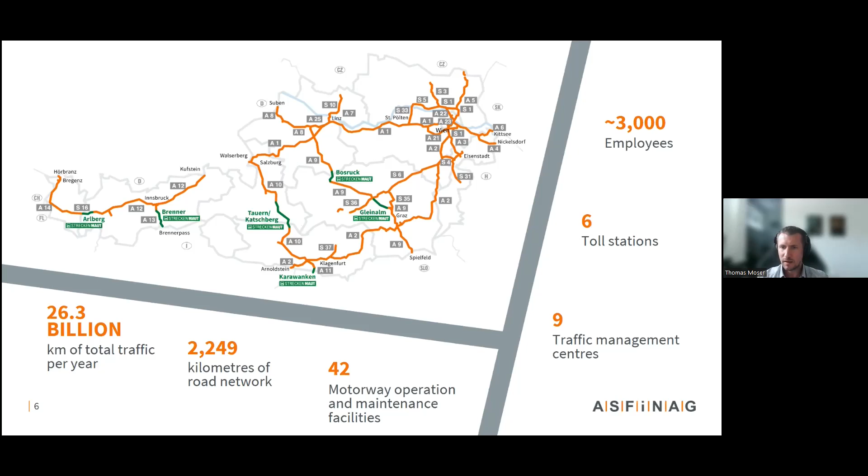We handle about 26 billion kilometers of total traffic per year with a road network of 2,249 kilometers. We have 42 motorway operation and maintenance facilities and 9 traffic management centers which are responsible for monitoring the traffic and setting actions if necessary, for example speed limits, lane closures, or rerouting if we have problems on our network. Furthermore, we have 6 toll stations for our special toll routes, for example the Karawankentunnel, Tauern-Katschberg, or the well-known Brenner. And all these tasks are provided with about 3,000 employees.

So let's get to our main assets. What are the main asset categories next to bridges? First of all, we have the pavement, which is one of the most important asset classes for any infrastructure owner. We have a total length of 2,249 kilometers, which means 12,200 lane kilometers, with an area of approximately 53 million square meters of pavement and asphalt, where about 2/3 is asphalt and 1/3 is concrete pavement.

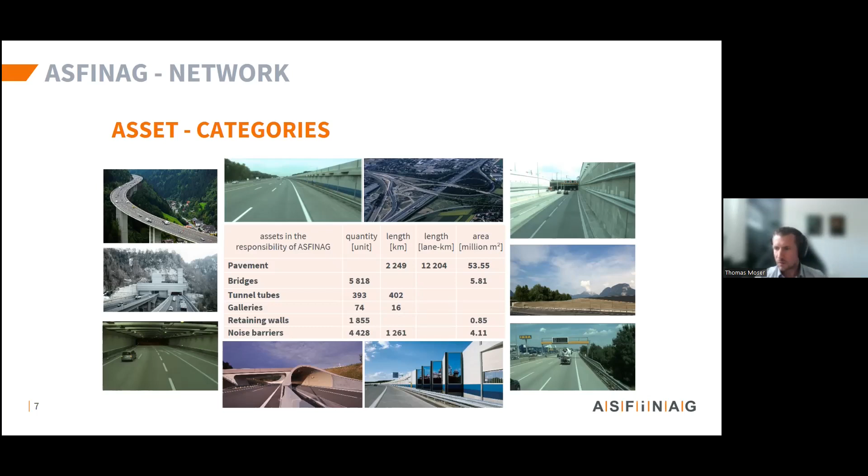The next important assets are the bridges. We have 5,818 bridges with a total area of 5.8 million square meters, which means our average bridge is about 1,000 square meters. Due to our topography in Austria, we have, in relation to our net length, a high amount of tunnels. We have 393 tunnels with a length of 402 kilometers.

And the next assets are also very important, but we call them minor assets. So we have 74 galleries, which are often connected with our tunnels, 1,855 retaining walls, and approximately 4.1 million square meters of noise barriers. And this area is still rising, so we expect a little more in the near future.

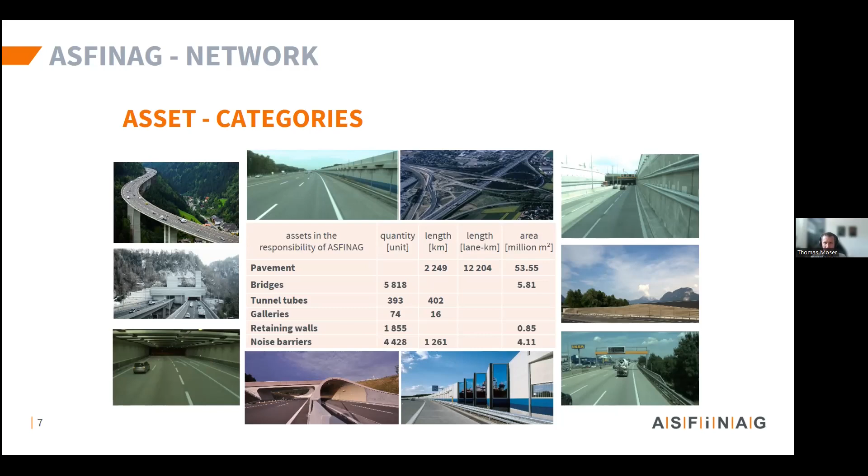In 2021, for example, we have a very huge new tunnel project, the second tube of our Karawankentunnel, and a very interesting big construction site in Vienna at the A23. It's the Hochstraße St. Marx. It goes right through the city of Vienna, and there was an amount of more than 100,000 square meters of bridge maintenance, which cost about 130 million euros. So this is one of the most expensive bridge constructions in 2021.

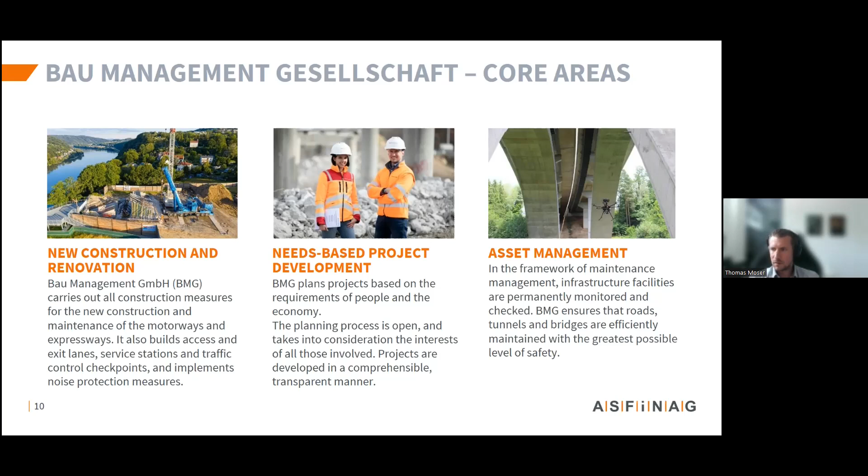To understand our budgetary needs for the future, I want to show you the development of our network. We can see we have a high increase of our network due to the 70s and 90s, which leads to increasing expenditure due to this extension.

And when we look at the chart, we see that all assets which were built before 1985 are relevant for maintenance and reconstruction now. So we have a high amount of assets and areas which are budget relevant now. All other assets, so let's say after 1985, are not relevant at this time, but they will be relevant in the future. This is a very important thing.

On the right-hand side we see the average age of our assets. We can see that the bridges, for example, are on average 38 to 39 years old, which means the first big maintenance is just done or shortly before. It's always a big impact on our budget.

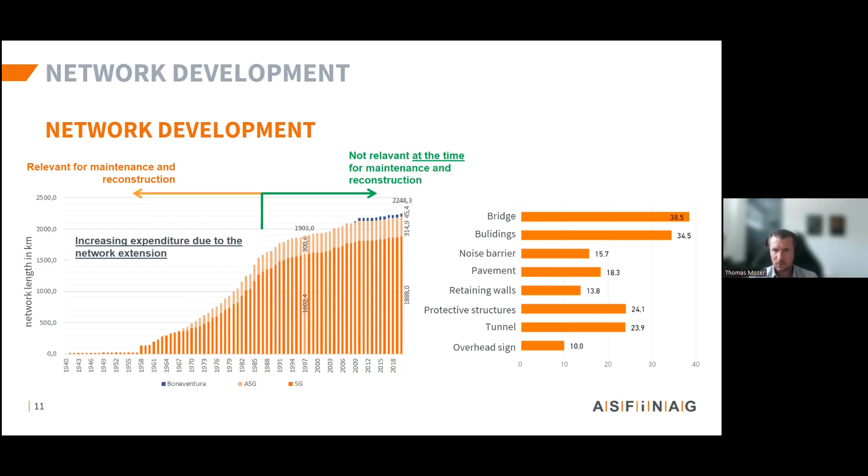And when we look 30 to 40 years into the future, there we have a huge renewal time for our bridges in the network. In detail for our bridges, about 50% of our bridge surface in our network was built between 1970 and 1990, which means the average age is about 38 to 39 years.

On the right-hand side we have a distribution of our bridges combined with their condition, where we can also see this high amount of bridges in the years between 1970 and 1990, this area here. We have a combination of the distribution of building year and condition, and we can see that all the bad condition and very bad condition - 4 or 5 condition rating - are the older constructions.

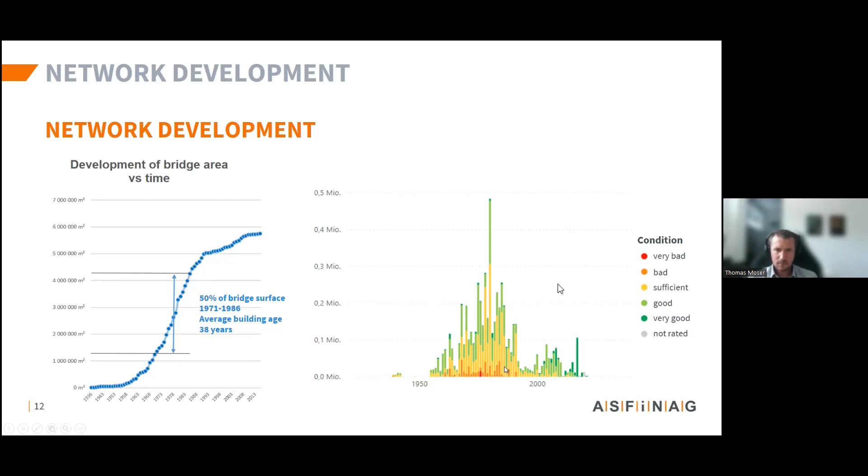In the last slides, we saw how the network was developed. To be able to maintain an aging infrastructure, the budget and budgetary needs must also rise. As we can see here, the budget for maintenance is constantly rising. These numbers are just the budget for maintenance, not building completely new roads and new infrastructures.

As we can see here, until the year 2021 we have the budget we used, and from 2021 into the future we have the planned budget. For example, in 2020 we used about 192 million euro for maintaining our pavement and 207 million euro for maintaining our bridges. In the future, these amounts are still rising.

In the year 2025, 232 million euro for pavement and 283 million euro for our bridge maintenance program. The forecast shows us that we will reach a steady state for our budgetary needs at about 1,000 million euro in the year 2056, after a huge peak in 2048, with a price basis of 2021.

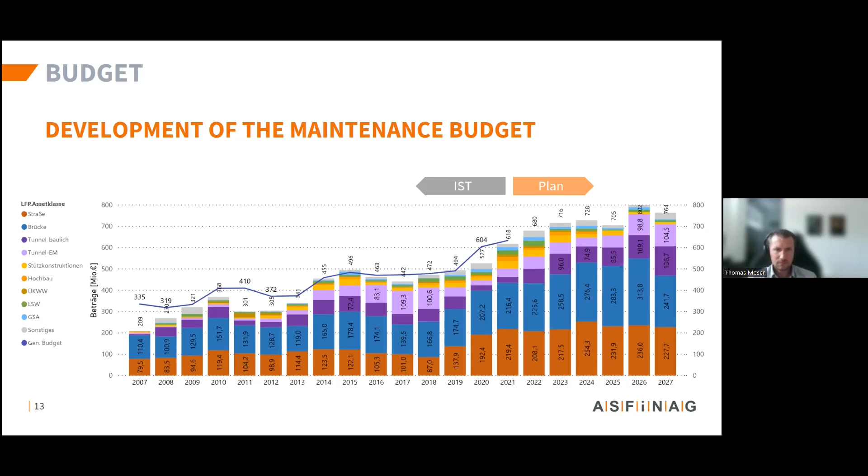One main topic is the definition of maintenance measures for our assets. On the other hand, we have the team engineering, responsible for developing the maintenance strategy, reporting, and coordination with the ministry, which is the owner of ASFINAG. In addition, the colleagues from engineering are also responsible for technical support on site, coordination of participation in guidelines, and organizing the internal inventory documents for all our assets in our network.

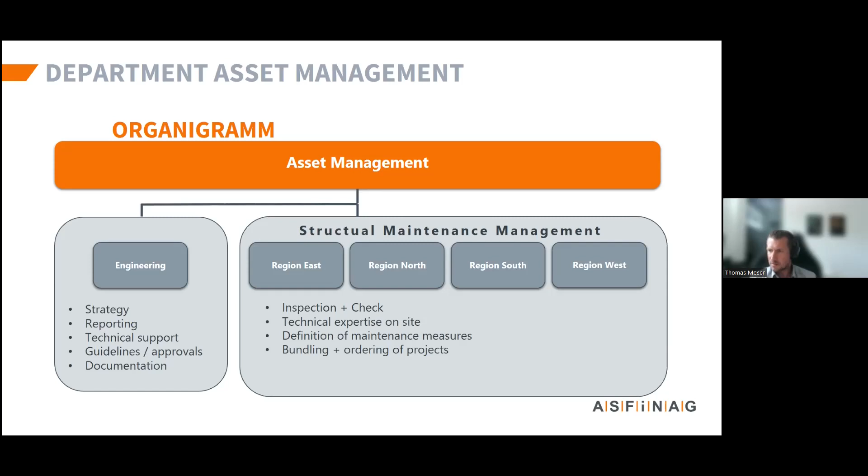So I told you something about our maintenance strategy. To fulfill the targets of the company, a maintenance strategy was developed in the past based on the mission of ASFINAG. We divided it into 3 different levels to manage our goals. The first level focuses on the main strategy, which is anchored in the mission.

For example, for structural safety, we have to have condition-defined measures for our structural engineering buildings if we have a condition rate of 4 or 5. These defined measures could be a building measure, a reduced inspection interval, monitoring, or organizational measures such as lane closures, for example.

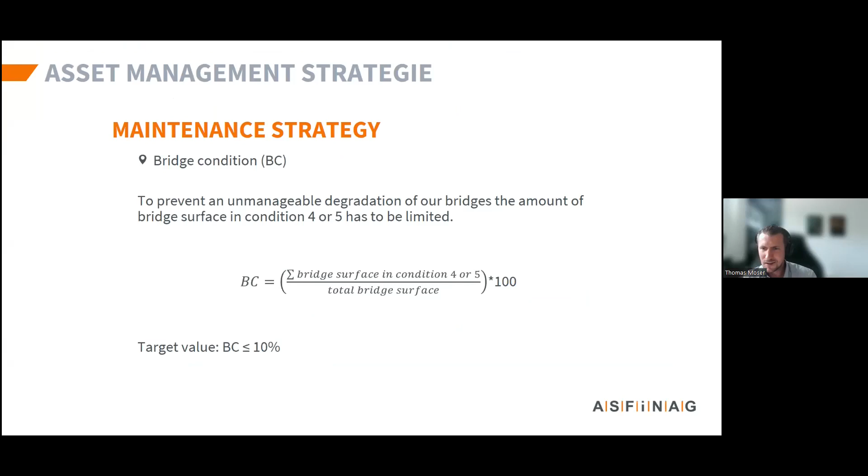The reason why this KPI is in the column network availability is because with a high amount of bridges in a bad or very bad condition, we are not able to provide an available network according to our targets.

And we want to manage our projects, and we don't want to be managed by our projects. So we try to limit the bridges in a bad and in a very bad condition.

Actually, we have about 7% of our bridge surface in condition 4 or 5, but just one bridge is in condition rate very bad, and this will be reconstructed next year. So 7% in condition 4.

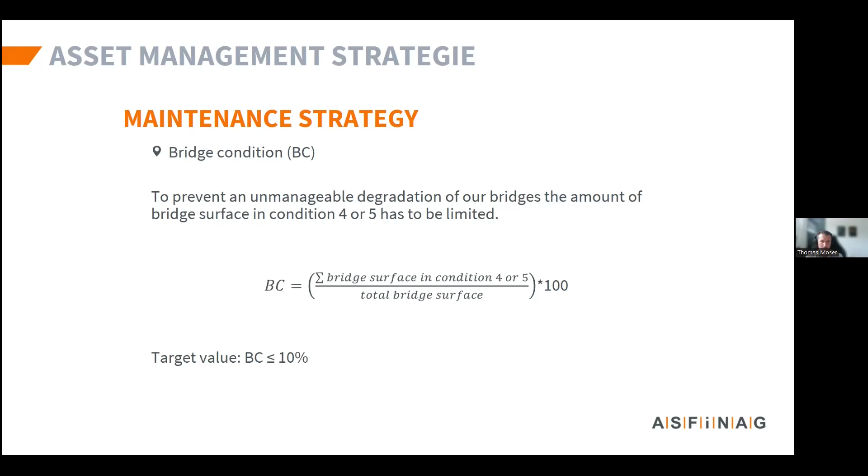So what are the management tools we use to manage our assets? We distinguish our tools in two main groups: software tools for operational activities and software tools for reporting and analysis.

On the one hand, we have the infrastructure management tools, a tool for the visualization of the pavement condition, and some other project management tools, for example, project request management and project management system.

And on the other side, we have software tools for reporting and analysis. For example, the pavement management analysis tool, dTIMS, and a common Microsoft tool, Microsoft Power BI, a business intelligence tool.

Where we are able to show information from different databases and combine information from different databases and combine data so that we can gain knowledge from the different data and the different information.

So the colleagues are on site with a tablet or an iPad or something like this, or another handheld, and do the inspections and the checks via iPad online.

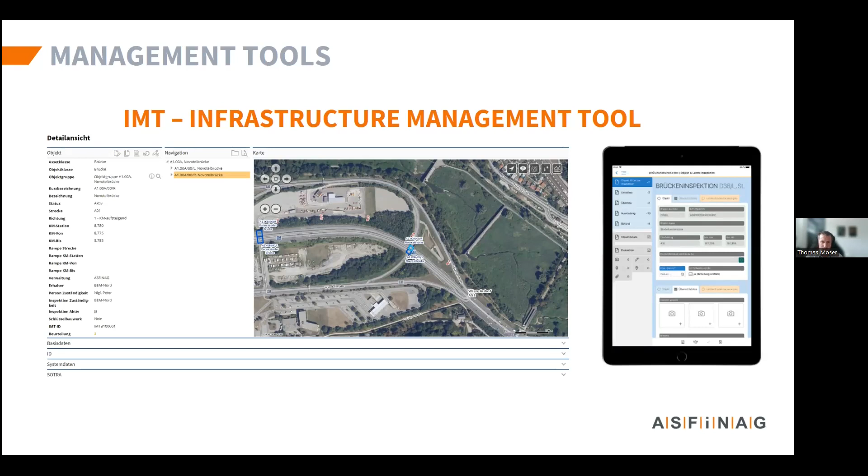And then we transfer all the data into our database. And the front end in here is the program ProOffice, and all the data are organized with this program. So this is our main tool to organize inspections, checks, and to organize our data.

And in the future, we will be also able to show information of our construction program so that we can directly see the pavement condition in the affected areas or in the planned maintenance areas.

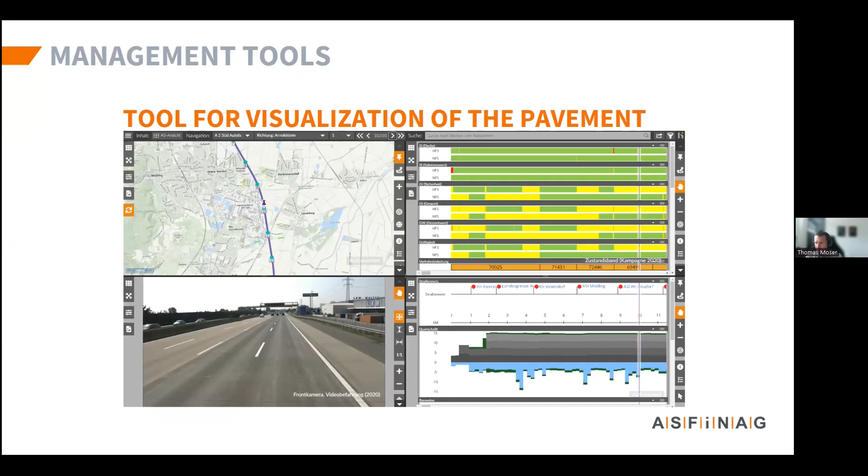For example, we have 3,213 bridges with a condition rate good.

So for example, we have at the A1 approximately 500,000 square meters of bridges on the whole track.

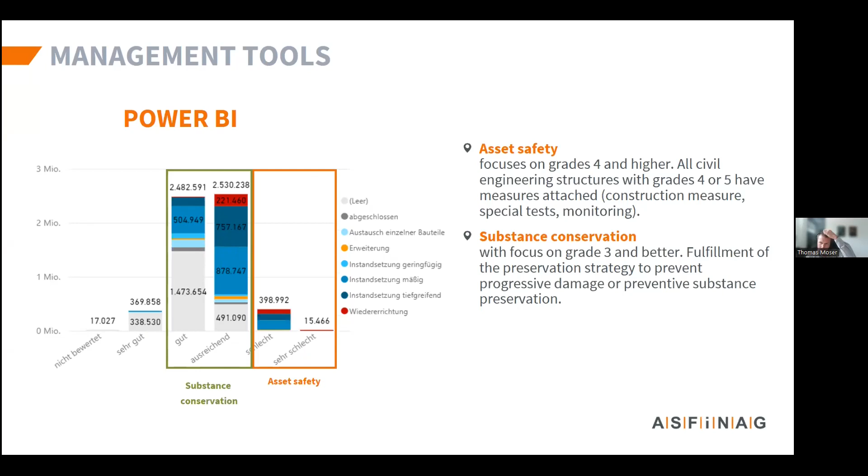So, and the next thing, the recalculation of bridges at ASFINAG.

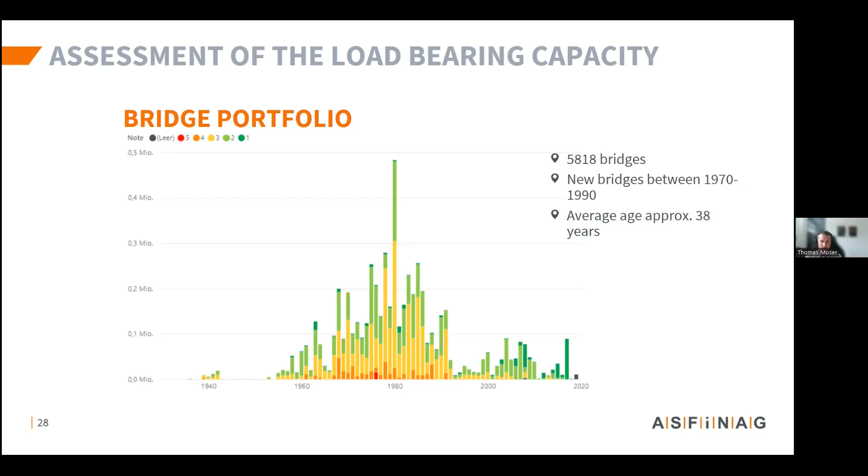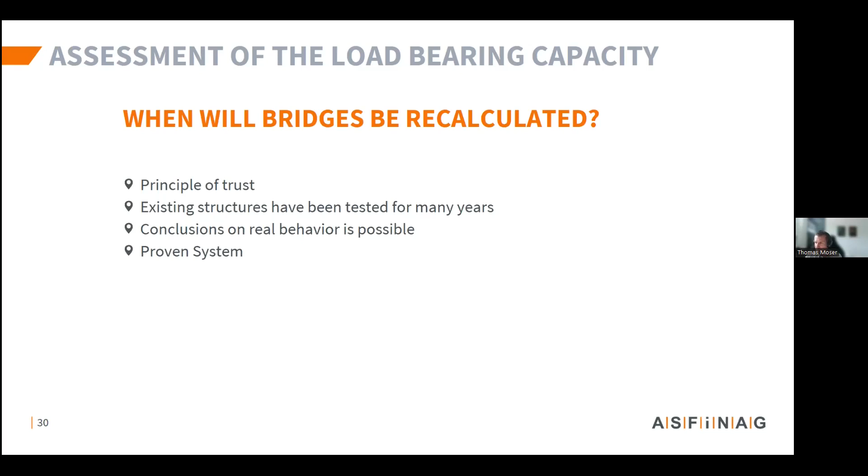So when do we recalculate? In general, we have the principle of trust. So we trust those people who calculated and designed the bridges in the past. Existing structures have been tested and used for many, many years. And we have conclusions on the real behavior. And it's a proven system. So why should we recalculate all of our bridges?

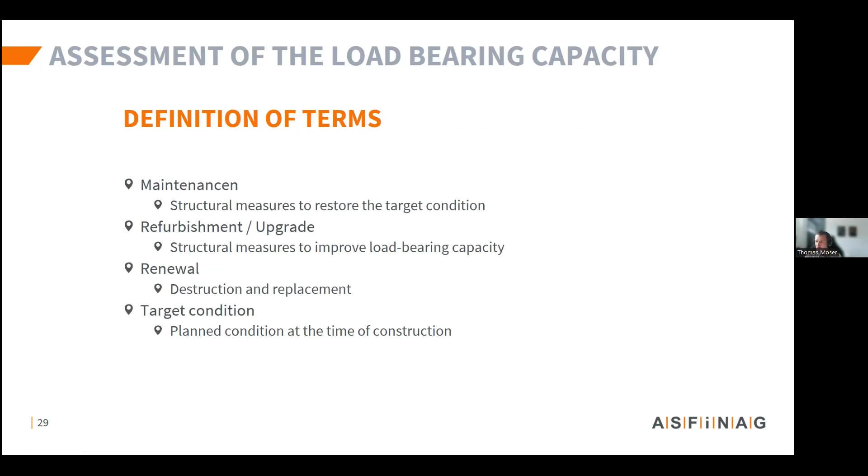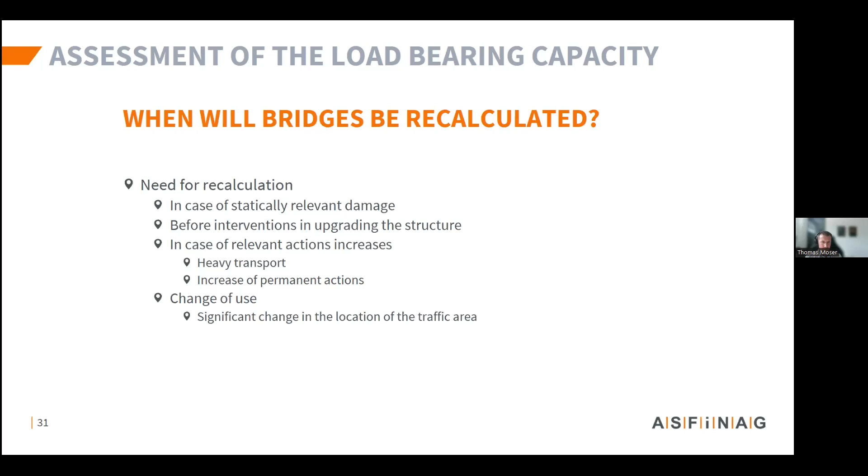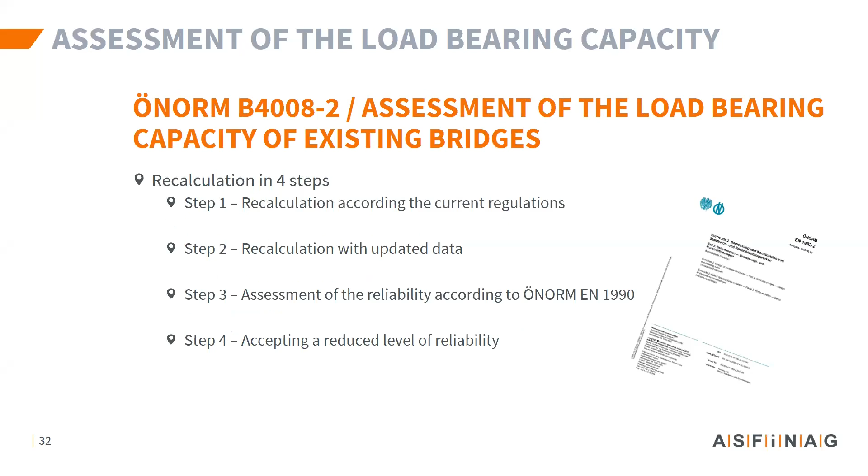So the first step is a recalculation according to the current regulation, current Eurocode. So for example, if everything is fine with this bridge, step 1, check, everything is done. But most of the time, we can't fulfill all the requirements. So then we get to step 2, the recalculation of the bridge with updated data.

So we are able to use actual material parameters of steel or concrete if we verify these updated material data via tests. And we are also able to reduce the partial safety factor on the resistance side if we prove the real dimensions of the system. So check the length, the width, the spans, something like this. If we do so, we are able to reduce the partial safety factor only on the resistance side.

And if we fulfill all requirements, check, we are done, and the recalculation is finished. If not, we have the possibility to do 2 more steps, and step 3 is an assessment of the reliability according to the Eurocode. And step 4 is then accepting a reduced level of reliability.

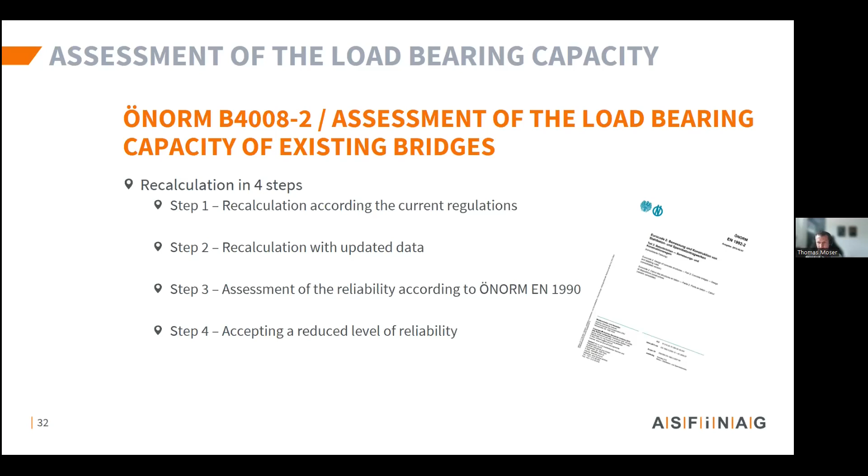So this was a brief and short overview of the assessment of load bearing capacity of existing structures. And I think it was very quick. I'm at the end of the presentation, and I hope I could give you a brief view inside the ASFINAG and how the ASFINAG is organized and how we manage our assets, so that we now have enough time to answer some questions. Thank you.

Okay, thank you, Mr. Moser, for this very nice presentation. I'm sure there are a lot of questions now, and one is already here in the chat. I don't know if everybody sees it.

Mr. Roberts Ozins asked a question which was in a way already answered, but I think it would be nice to elaborate on it. Mr. Ozins asked, what asset management system program are you using? And is it a commercial or off-the-shelf system, or how do you solve this issue at the organization?

Our infrastructure management tool is a customized program which is off the shelf. So we bought a license of the software, and we customized it to the needs of ASFINAG. And Power BI and all these analyzing tools are off-the-shelf Microsoft programs. Okay, I hope that answered the question.